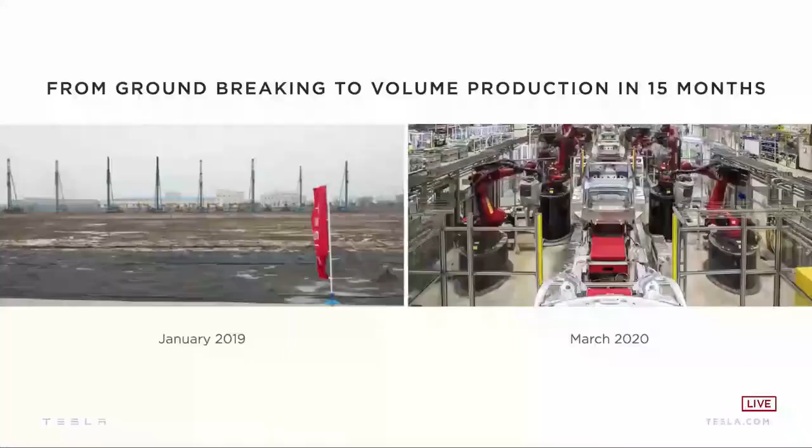So really, I'm just going through a recap of what's happened over the past year or so, starting with our ability to create a factory. Huge kudos to the Tesla Shanghai team for being able to go from literally a dirt pile to volume production in 15 months. It's like, damn.

Something that's really quite noteworthy here is Tesla is the only foreign manufacturer to have a 100% owned factory in China. This is often not well understood or appreciated, but to have the only 100% owned foreign factory in China is a really big deal, and it's paying huge dividends here.

We really wouldn't have the results that we have had this year without the great efforts of the Tesla China team, so I'm super appreciative of that. And we'll see the Shanghai factory continue to scale quite a bit from where it is right now. I think we could really expect that to be, over time, a factory that produces over 1 million vehicles a year.

It's cool. So we also reached volume production of the Model Y this past year, and this was the smoothest launch that we've ever had. So I think we're definitely getting better at new vehicle launches, building factories, and scaling production. As I've said before, the hardest thing is scaling production, especially of a new technology.

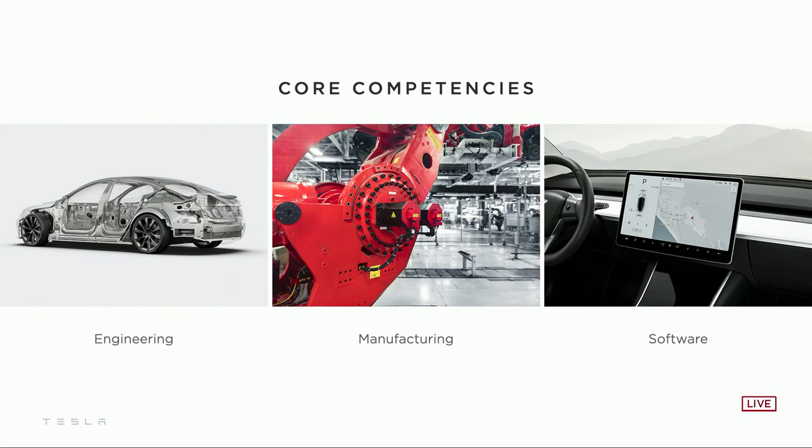Tesla's core competencies: engineering, obviously, but also manufacturing. I think manufacturing is underappreciated in general, and the difficulty of designing the machine that makes the machine is vastly harder than the machine itself. So making a Model 3, Model Y, or Cybertruck prototype is really quite trivial compared to designing the factory that makes it. Especially with new technology and new manufacturing methods, it's at least 10 to 100 times harder to do the factory than the prototype. That's why a lot of companies or startups bring out a prototype but can't get it over the hump for manufacturing, because manufacturing of new technology is the hardest thing by far.

Basically the prototype is at best 10% of the difficulty, probably closer to 1%. And then software—Tesla is both a hardware and a software company, so a huge percentage of our engineers are software engineers. You can think of our car as kind of like a laptop on wheels, so software is incredibly important, not just in the car but also in the factory. The factory software is extremely important. These are the 3 critical areas needed to make an awesome company.

We now have, and will soon have, 3 new factories on 3 different continents. Shanghai—we're expanding with the second phase. Berlin is making rapid progress. And Texas is making even faster progress.

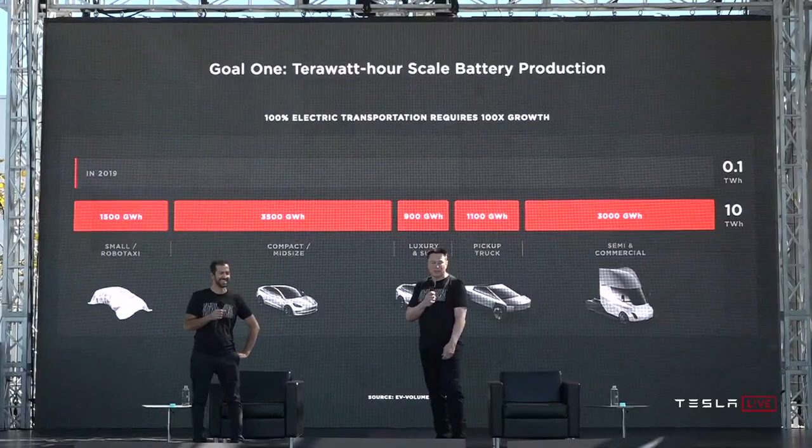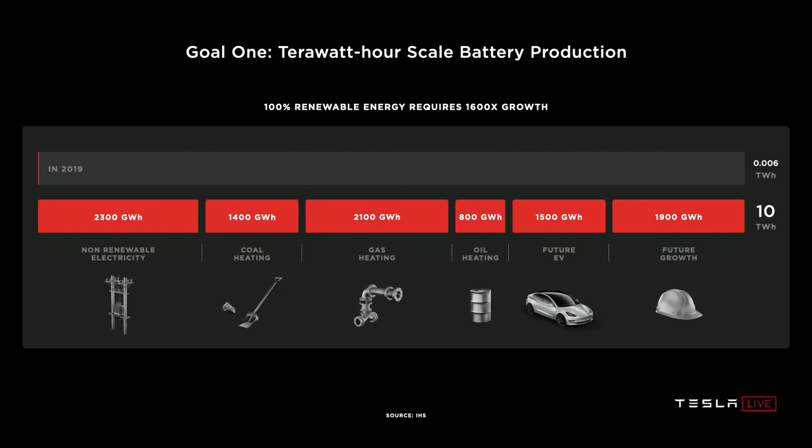And then on the grid side, we have a similar mountain to climb: 1,600 times growth from today's grid batteries to go 100% renewable on the grid and to take all of the existing heating fossil fuel uses in homes and businesses to 100% electric.

And this number, I think, might grow even more, as the world economy matures and as countries with high populations industrialize, we could see this number be even more. But let's say it's roughly 20 to 25 terawatt hours per year, sustained for 15 to 25 years, to transition the world to renewable. This is a lot.

So today's batteries cannot scale fast enough. They're just too small. For Giga Nevada, 150 gigawatt hours per year is like what we probably expect to make out of there. But this is really pretty small in the grand scheme of things. That's only 0.15 terawatt hours.

And they cost too much. So we would need 135 fully built out Nevada gigafactories to achieve 20 terawatt hours a year. It's not scalable enough of a solution. We need a dramatic rethink of the cell manufacturing system to scale as fast as we can and should.

And I think we should view this as more than just a question of money. Money is sort of like an ethereal thing, but it's really the amount of effort. You have a certain amount of effort in terms of people and machines, and depending on how efficient that effort is, for a given amount of effort, you want the most amount of batteries. So it's not just a question of, well, if we had $2 trillion, tomorrow you could make this. It's not that easy. You actually need to organize a massive number of people, build a lot of machines, build the machines that make the machines, and so it's incredibly important to have that effort yield the most number of batteries.

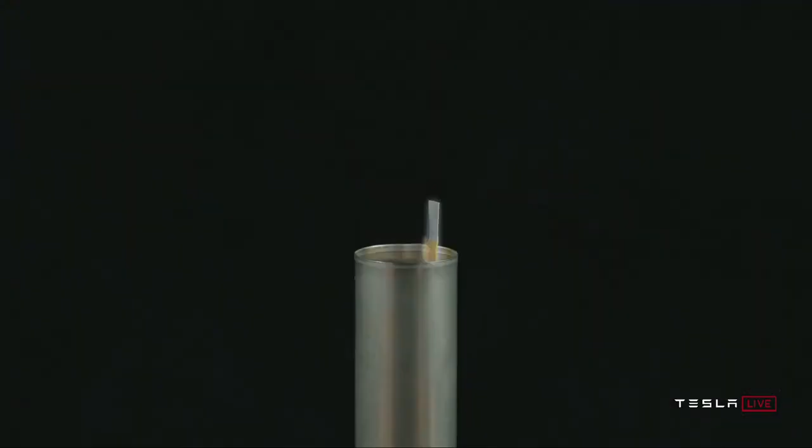So first, before we get too far into it, let's talk about what is in a battery cell. We've got the cap and the can, negative and positive terminals of the cell. When you open that cell, you've got a tab connected to those terminals, what we call the jelly roll, which is the wound electrodes on the inside.

You can actually see what this looks like as you unwind it. This is over a meter long in a typical 2170 cell, so it's quite a long winding process. And you can see the tab still there.

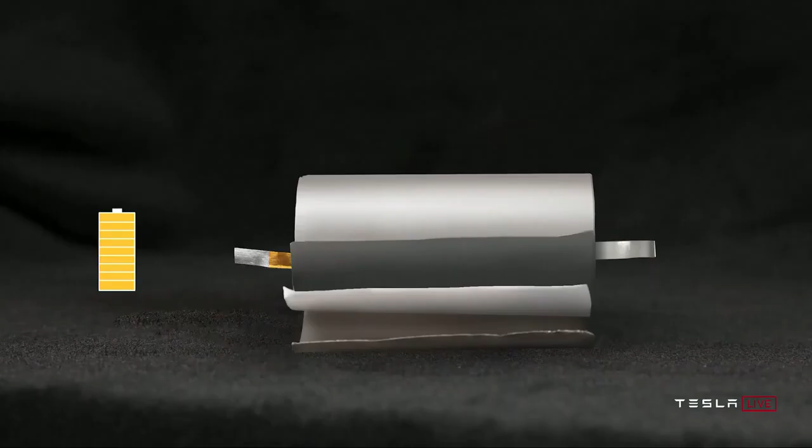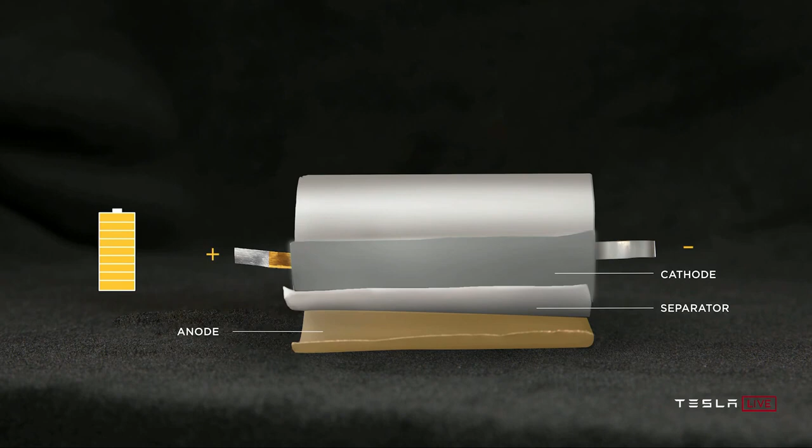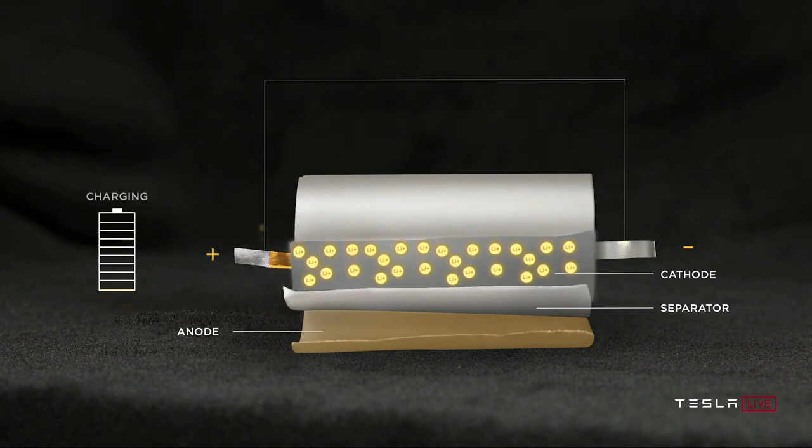To explain what's actually going on here, we've identified anode, cathode, separator, positive and negative terminal. Watch what happens as we discharge the cell: lithium moving from anode to cathode. When we charge the cell, lithium moves from cathode to anode across the separator. This is the basic principle of all lithium-ion batteries, no matter what the form factor is.

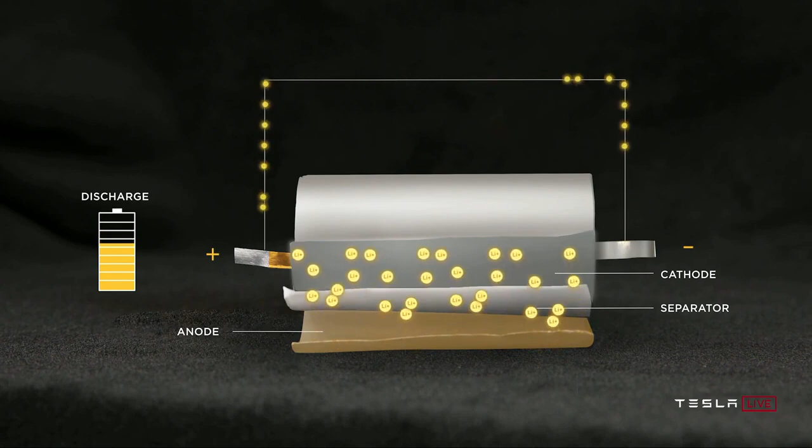When we look at what's happened to date, at least in our products, we've moved from the 18650 form factor to the 2170 form factor through great collaboration with our partners, Panasonic, new partners like LG and CATL, and probably others in the future.

A slight note on why is the one called the 18650, versus the 2170: the first two digits refer to the diameter, and the second two digits refer to the length. That helps explain why these weird numbers. But nobody could explain to me why there was an extra zero. So I said, okay, well we're deleting the zero that nobody can explain in future form factors. So technically it's the 18650, but going forward it's the 2170 because we just got rid of the extra zero since it's pointless.

This was an evolutionary step, going from 1865 to 2170, bringing 50% more energy into the cell. But when we look to the ideal cell design, if we were to do it ourselves, we need to go beyond just what's in front of us, and study the full spectrum of options.

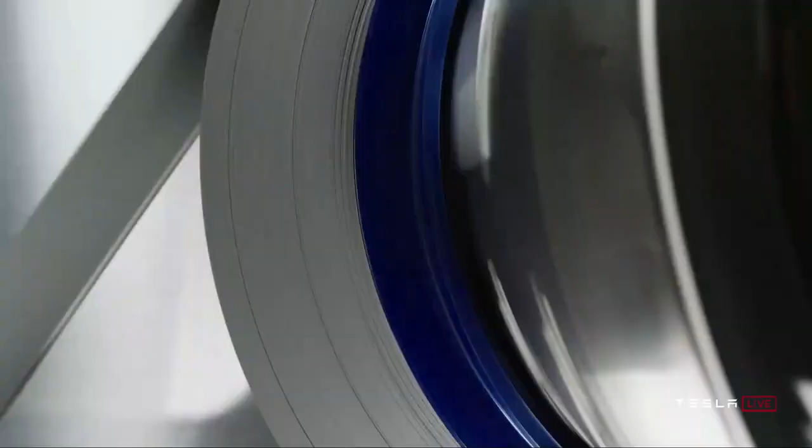And I want to stress, this is not just a concept or a rendering. We are starting to ramp up manufacturing of these cells at our pilot 10 gigawatt hour production facility just around the corner. Here's a video of some of what's going on in the plant.

To be clear, it will take about a year to reach the 10 gigawatt hour capacity. This is important to appreciate. When you build a factory, there's a certain capacity you design to, and then it takes some period of time to actually achieve that capacity. So it's probably about a year before we get to the 10 gigawatt hour annualized rate with the pilot plant, and this is just a pilot plant. The actual production plants will be more on the order of maybe 200 gigawatt hours, maybe more over time.

Let's stack up everything we just saw at the cell level. Just the cell form factor change enables a 14% dollar per kilowatt hour reduction. And now that you've been teased on this factory, we're going to go step by step through that factory and discuss a series of innovations there.

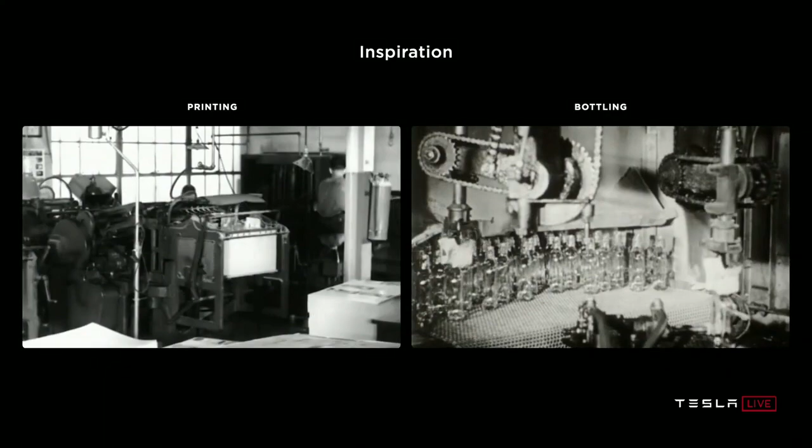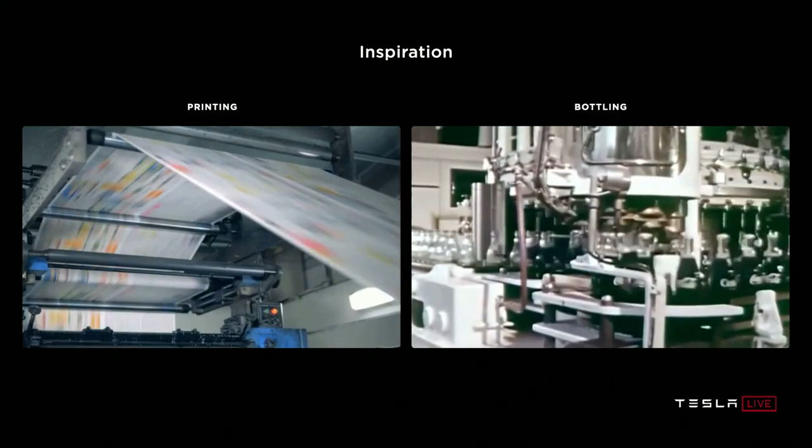When thinking about the ideal cell factory, we have inspirations behind us in the paper and bottling industry, where from humble beginnings, over a century of innovation has enabled mass scale, continuous motion, unbelievably low manufacturing cost. When we think about the lithium-ion industry, which is really only in its 3rd decade of high-volume production, it has so far to go to achieve similar scale and simplicity. That was the inspiration we set out to the team as we thought about how to marry cell design and manufacturing in the best possible factory.

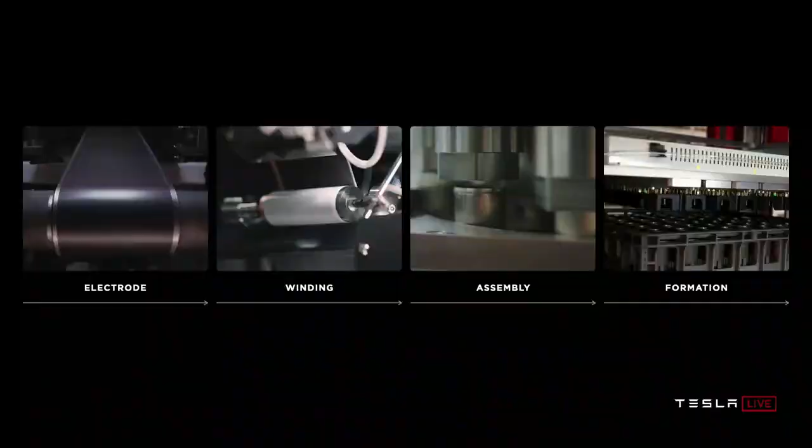Let's talk about what's in a cell factory. First, there's an electrode process where the active materials are coated into films onto foils. Then those coated foils are wound in the winding process we just talked about, where if you do have tabs, you have to start and stop a lot. Then the jelly roll is assembled into the can, sealed, filled with electrolyte, and then sent to formation, where the cell is charged for the first time, and where the electrochemistry is set and the quality of the cell is verified. We set out at every step of this process to take that inspiration and think about how we make those processes fundamentally better and more scalable.

One of the most important processes is where it all begins, the wet process of the electrode coating. Just to give you a sense of scale, I'm going to walk through what's in that wet process.

You've got mixing, where the powders are mixed with either a water or a solvent for the cathode. That mix then goes into a large coat and dry oven where the slurry is coated onto the foil, huge ovens, tens of meters long, dried, and that solvent then has to be recovered. You can see the solvent recovery system. And then finally, the coated foil is compressed to the final density.

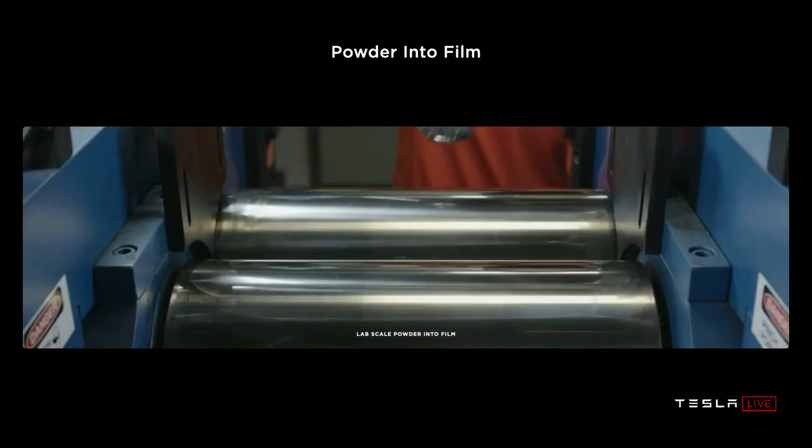I mean, it's hard, actually, just to be clear. If this was easy, everyone would do it. So it's not like dry coating electrode is actually easy. It's actually very hard to do what appears to be a simple thing.

It's worth noting we did acquire Maxwell a little over a year ago. It's certainly a good company, but the dry coating they had was like, I would call it proof of concept. Since the acquisition, we've actually revved the machine that does the dry coating 4 times. So we're in revision 4 post-acquisition of the machine, and there's still a lot of work to do. I would not say this is completely in the bag.

As you go from benchtop to lab to pilot to volume production, there are actually major issues that you encounter at every level. It's not like you make something work on your bench and bingo, now you can make a bazillion of it. It's insanely difficult to scale up. But if you do scale it up, what you saw before becomes this. So you can see the motivation.

A 10 times reduction in footprint, a 10 times reduction in energy, and a massive reduction in investment. But as Elon was saying, simple is hard.

I would like to not say that right now it's totally working. It's close to working, but even now at the pilot plant level, it's not there yet. Well, it's fair to say it does work, but with not a high yield.

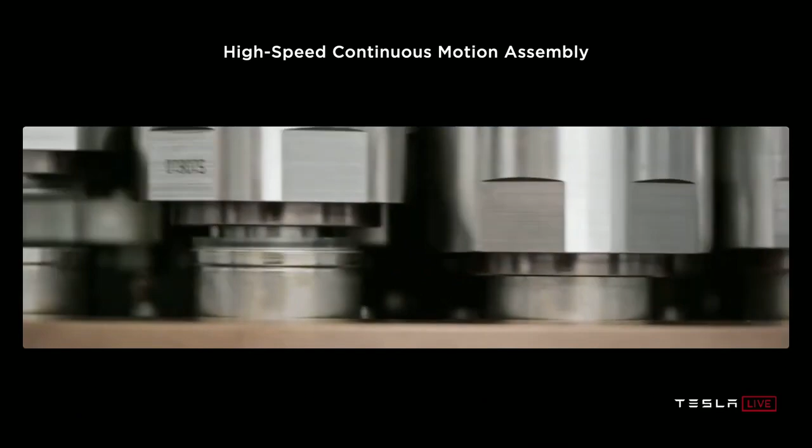So let's talk a little bit about assembly, which is next. The key to a high-performing assembly line is accomplishing processes while in continuous motion, thinking of the line as a highway: max velocity down the highway, no start and stop, no city driving. Exactly, no stoplights or traffic lights. You want the highway. I want the highway.

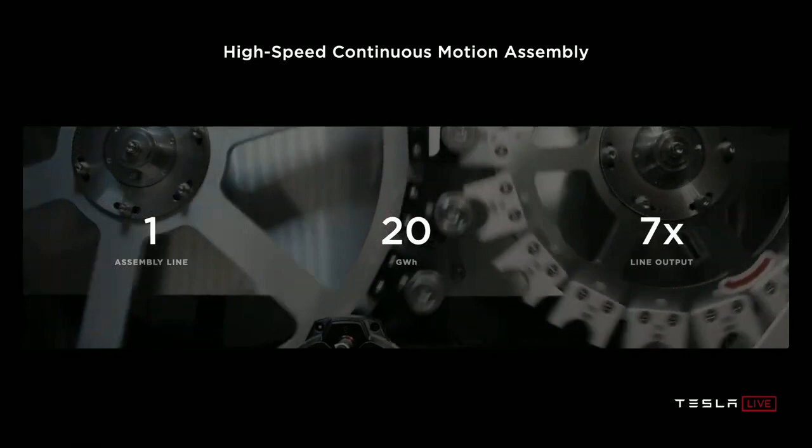Together with our internal design team that makes and designs this equipment, we coupled thinking about how to make the best cell with thinking about how to make the best equipment, so that we could accomplish the fastest parts per minute rates on all of these tools. Through that development, we were able to implement assembly lines: one line, 20 gigawatt hours, a 7 times increase in output per line. When you're thinking about scalability and pure effort, having one line be 7x the capability is just effort multiplying.

You can think about the fundamental physics of a factory. I think it's actually quite a lot like the rocket equation, where you've got your exhaust velocity and then the log of the start to end masses. So it's basically saying how fast are things going, and what percentage of the factory volume is doing useful work — conveyance does not count as useful work.

Only the value-added steps. If you break the factory down into cubic meter sections, or smaller, like 1 liter sections, and ask: is a majority of this volume doing useful work? You would be astounded at how bad most factories are — they're like maybe 2 or 3%, including our factory in Fremont. I think it is possible to get to at least 10 times that volumetric efficiency, more like 30% ish, maybe more, and be 10x better, which means the factory can be 10 times smaller.

And then the other thing is, how fast are things going through the factory? It's speed and density. The faster you go — a factory moving at twice the speed of another is equivalent to two factories basically — and the company that will be successful is the company that with one factory can accomplish what other companies take 2, 3, or 4 factories to do. So what we're trying to do here is say, how do we with one factory achieve what maybe 5 or even 10 factories would normally be required to achieve?

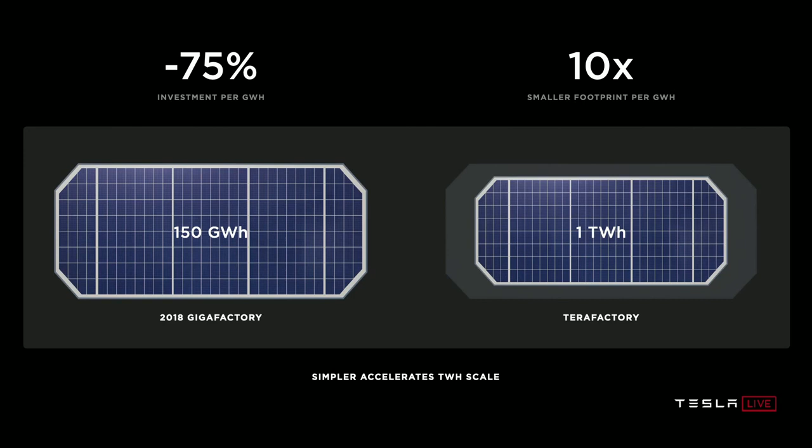Essentially what this translates to, based on what we know today, is about a 75% reduction in the investment per kilowatt hour or gigawatt hour. It's basically 4 times better than the current state of the art to the best of our knowledge. And I think there's probably room to improve even beyond that. Definitely, yeah.

We're able to, from a volume standpoint, actually get, in a smaller form factor than Giga Nevada, many times the cell output. So you can see, basically we can get a terawatt hour in less space than it took to make a gigawatt hour, 150 gigawatt hours.

So this is pretty profound. I would actually not have thought this was possible several years ago. That we could actually get to terawatt hour scale in less space than what we currently envision for doing 150 gigawatt hours. Yes, simpler accelerates terawatt hour scale, and that's what we need to do to accelerate our mission.

And as Elon said, we're going to try to even improve on this as we push towards our goals. So, this is just talking about Tesla internal cell production.

As I tweeted out earlier, we will continue to use our cell suppliers, Panasonic, LG, and CATL. So this 100 gigawatt hours is supplemental to what we buy from suppliers. Essentially, this does reduce our weighted average cost of a cell, but it allows us to make a lot more cars and a lot more stationary storage. Long term, we're expecting to make on the order of 3,000 gigawatt hours, or 3 terawatt hours, per year.

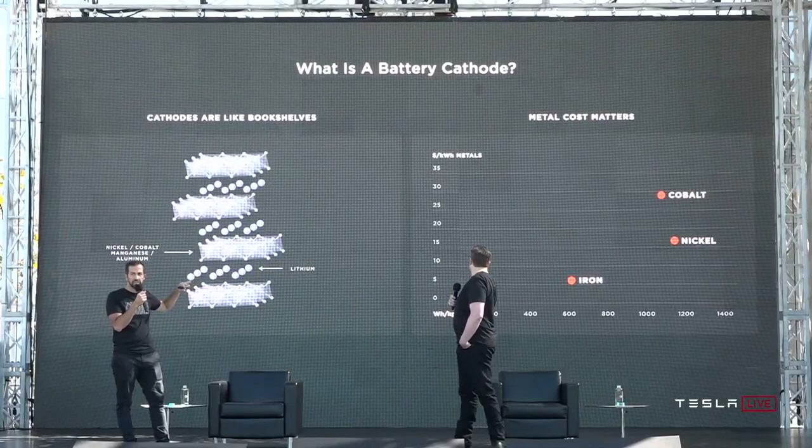Absolutely, I totally agree. And I think people are always talking about like, oh, what's the cathode going to be, is it NCA or whatever? The thing to consider is just fundamentally what the nickel, the metals are capable of, and that's what we have on the chart here: dollar per kilowatt hour cathode of just the metal, using LME, London Metal Exchange prices, versus the energy density of just the cathode. You can see nickel is the cheapest and the highest energy density, and that's why increasing nickel is a goal of ours, and really everybody's, in the battery industry.

But one of the reasons cobalt is even used at all is because it's a very stable bookshelf, and the challenge with going to pure nickel is stabilizing that bookshelf with only nickel. That's what we've been working on with our high nickel cathode development, which has zero cobalt in it. Leveraging novel coatings and dopants, we can get a 15% reduction in cathode dollar per kilowatt hour. Big deal.

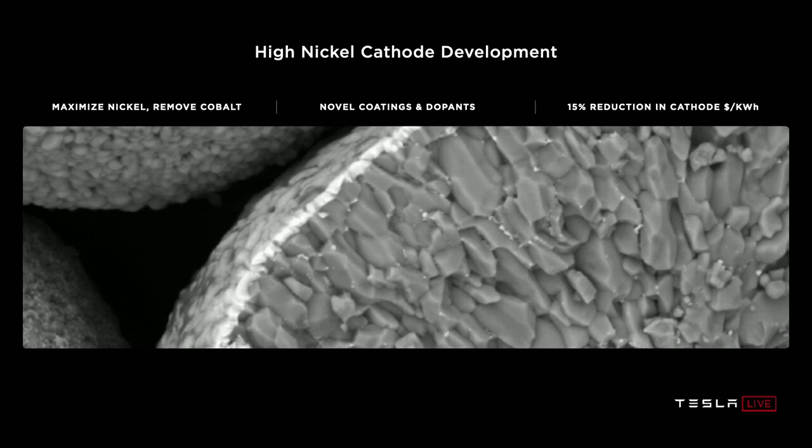But it's not just about nickel. In order to scale, we really need to make sure we're not constrained by total nickel availability. I actually spoke with the CEOs of the biggest mining companies in the world and said, please make more nickel, it's very important. And I think they are going to make more nickel.

But there's also, I think, a need for a 3-tiered approach to batteries: starting with iron, that's kind of like a medium range, then nickel manganese as a medium-plus intermediate, and then high nickel for long range applications like Cybertruck and the Semi. Because something like a semi truck, it's extremely important to have high energy density in order to get long range.

Giving iron a bit more time - although if you look at watt-hours per kilogram at the cathode level, iron looks like it's half as good as nickel. But when you fully consider it at the pack level, everything taken into account, nickel is only about 50 to 60% better than iron. So iron is a little better than it seems when fully considered at the pack level - not as good as nickel, but actually pretty good. Good for stationary storage and medium range applications where energy density isn't paramount.

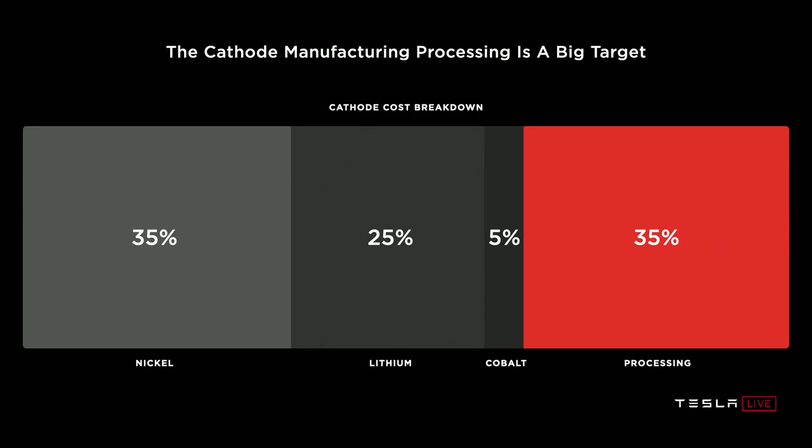Beyond the metals - because a lot of people spend time talking about metals - actually the cathode process itself is a big target. 35% of the cathode dollar per kilowatt hour is just in transferring it into its final form. So we see that as a big target, and we decided to take that on.

Here's a view of the traditional cathode process. If you start at the left, you have the metal from the mine. The first thing that happens is the metal is changed into an intermediate called metal sulfate, because that's just what chemists wanted a long time ago. Then when making the cathode, you take this metal sulfate, add chemicals, add a whole bunch of water, a whole bunch of stuff happens in the middle, and at the end you get that little bit of cathode and a whole bunch of wastewater and byproducts.

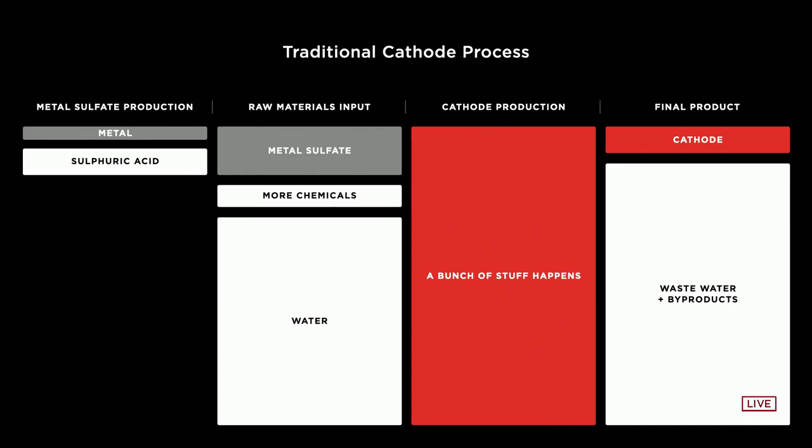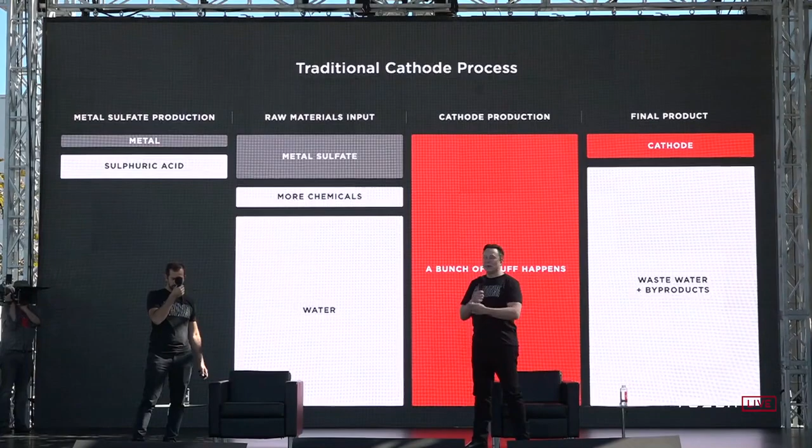It's insanely complicated. If you follow the journey of a single nickel atom, it's crazy - you're going around the world three times. It's the moral equivalent of digging a ditch, filling it in, and digging it again. Total madness, basically. These processes just grew up as legacy things - how it was done before - and people connected the dots without thinking of the whole thing from first principles: how do we get from nickel ore in the ground to the finished nickel product for a battery. So we looked at the entire value chain and asked how we can make this as simple as possible. That's what we're proposing with our process.

As you can see, a lot less is going on here. We get rid of the intermediate - metal, water, final product cathode - and recirculate the water, with no wastewater at all. Summarized, that's a 66% reduction in CapEx investment, a 76% reduction in process cost, and zero wastewater. A much more scalable solution.

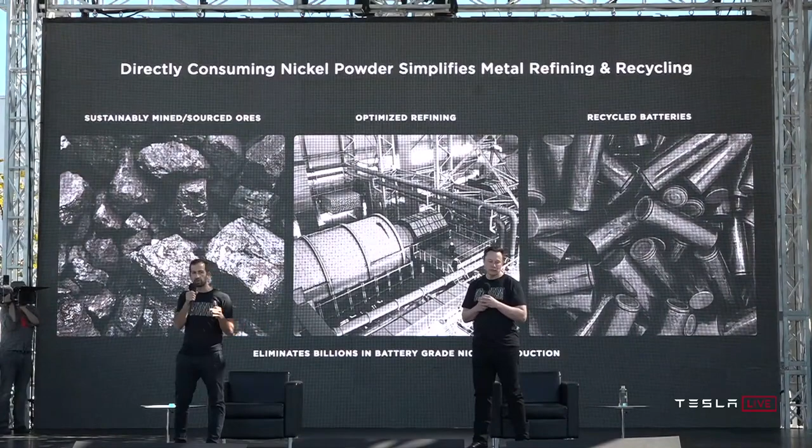When you think about the fact that we're now directly consuming raw metal nickel powder, it dramatically simplifies the metal refining part of the whole process. So we can eliminate billions in battery-grade nickel intermediate production - it's not needed at all.

We can also use that same process to directly consume the metal powder coming out of recycled electric vehicle and grid storage batteries. So this process enables both simpler mining and simpler recycling.

Now that we have this process, we're going to build our own cathode facility in North America, leveraging all the North American resources that exist for nickel and lithium. Just by localizing our cathode supply chain and production, we can reduce miles traveled by all the materials that end up in the cathode by 80%, which is huge for cost.

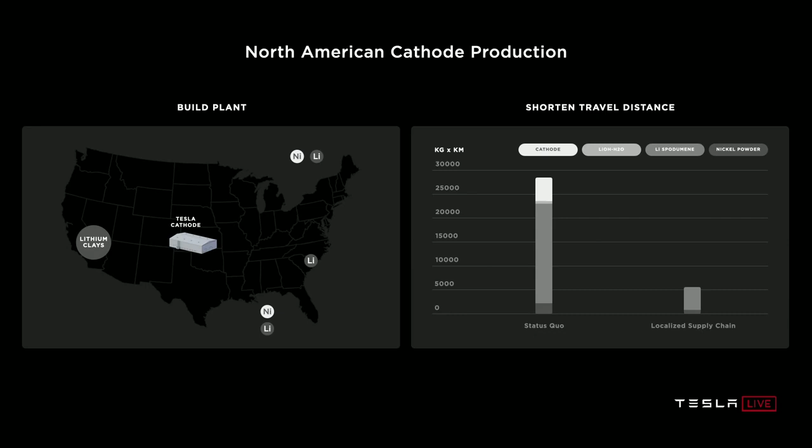To be clear, cathode production would be part of the Tesla cell production plant - basically raw materials coming from the mine, and out comes a battery. On that note, the way lithium ends up in the cell is through the cathode, so we should obviously do on-site lithium conversion as well, using a new process we're going to pioneer. That's a sulfate-free process again, skipping the intermediate - 33% reduction in lithium cost, and a 100% electric facility co-located with the cathode plant.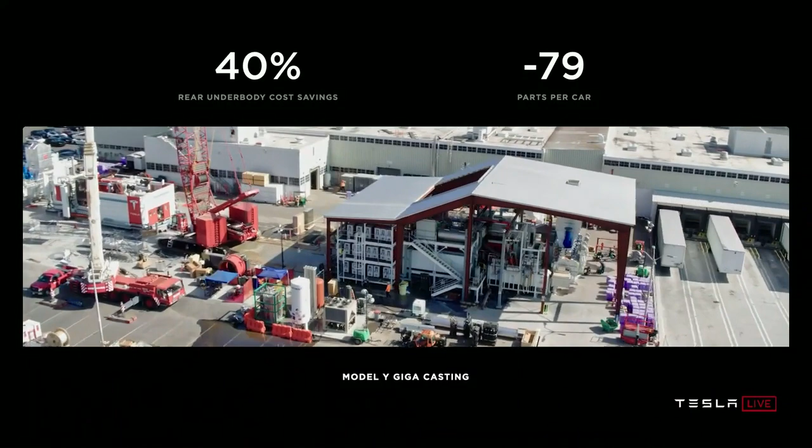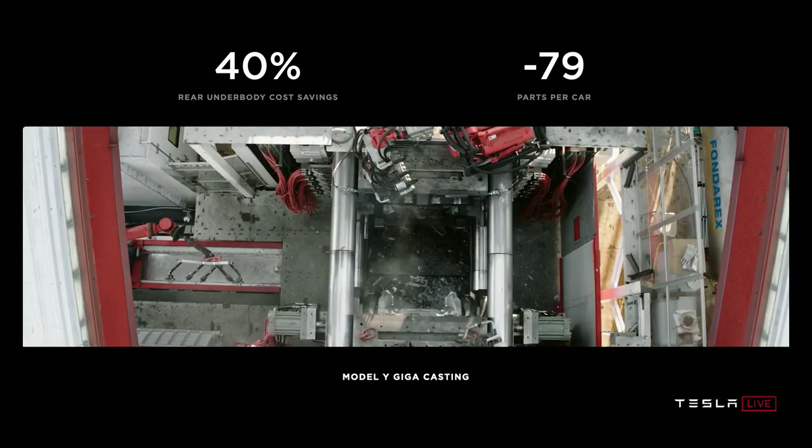So it starts with having a single piece casting for the front body and the rear body. And in order to do this, we commissioned the largest casting machine that has ever been made, and it's currently working just over the road at our Fremont plant.

We have it, it's pretty sweet, currently making the entire rear section of the car as a single piece, high pressure die cast aluminum. In order to do this, we actually had to develop our own alloy because we wanted a high strength casting alloy that did not require coatings or heat treatment. This is a big deal for castings, especially with a large casting. If you heat treat it afterwards, it tends to deform, kind of does this potato chip thing, so it's very hard to keep a large casting to have its shape. There was no alloy that existed that could do this, so we developed our own special alloy of aluminum that has high strength without heat treat and is very castable.

That's a great achievement of our materials team. In fact, in general, we've got a lot of advanced materials coming for Tesla, new alloys and materials that have never existed before. So you're basically making the front and rear of the car as a single piece, and then that interfaces to what we call the structural battery, where the battery for the first time will have dual use, both as an energy device and as structure.

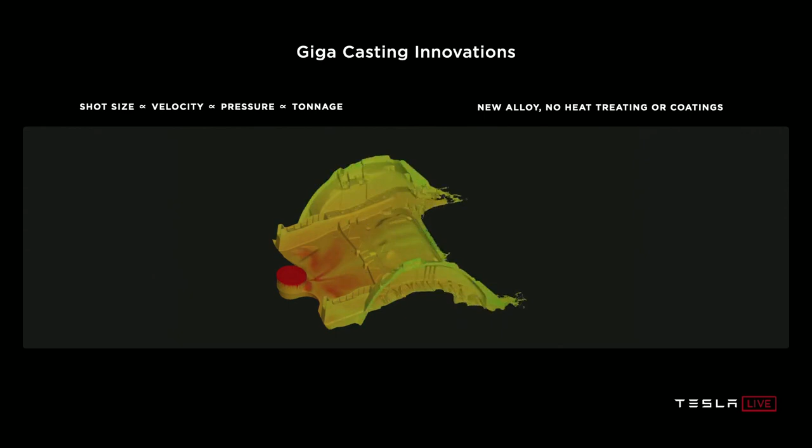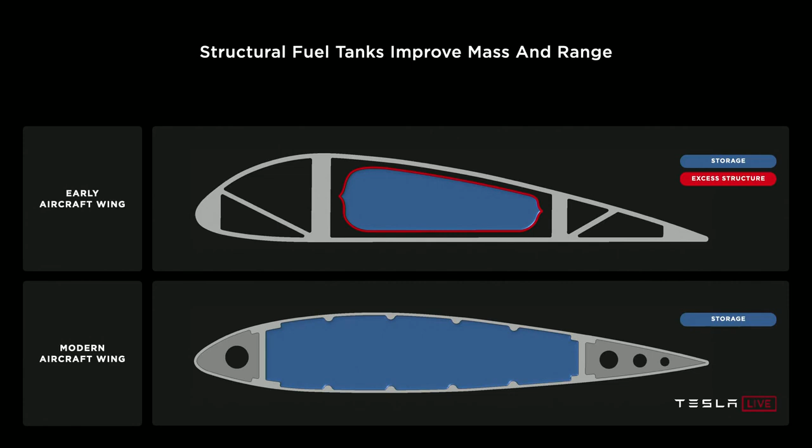This is absolutely the way things are done. In the early days of aircraft, they would carry the fuel tanks as cargo. The fuel tanks were actually quite difficult to carry, basically worse than cargo, you had to bolt them down. It was very difficult. Then somebody said, hey, what if we just make the wing tanks, what if we just make the fuel tank in wing shape? So all modern airplanes, the wing is just a fuel tank in wing shape. This is absolutely the way to do it. The fuel tank serves as dual structure, it's no longer cargo, it's fundamental to the structure of the aircraft. This was a major breakthrough.

We're doing the same for cars. So this is really quite profound. Effectively, the non-cell portion of the battery has negative mass. We save more mass in the rest of the vehicle than the non-cell portion of the battery weighs. So it's like, well, how do you really minimize the mass of a battery? Make it negative, make the non-cell portion of the battery pack negative.

It also allows us to pack the cells more densely because we do not have intermediate structure in the battery pack. Instead of having supports and stabilizers and stringers and structural elements in the battery, we now have a lot more space in the battery because the pack itself is structural.

What we do is essentially, instead of having just a filler that is a flame retardant, which is currently what is in the 3 and Y battery packs, we have a filler that is a structural adhesive as well as flame retardant. So it effectively glues the cells to the top and bottom sheet, and this allows you to do shear transfer between the upper and lower sheet. Just like if you have a Formula One car or a racing boat with carbon fiber face sheets and aluminum honeycomb between them, this gives you incredible stiffness. It's really the way any super fast thing works, you create a honeycomb sandwich with two face sheets.

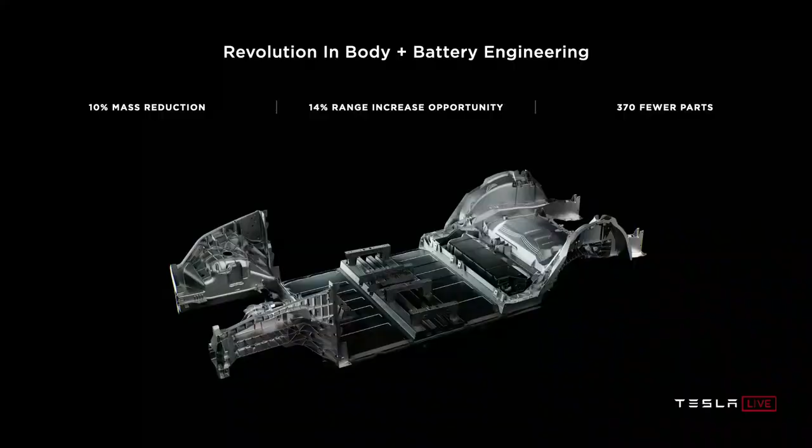So, like I said, 10% mass reduction in the body of the car, 14% range increase, and 370 fewer parts.

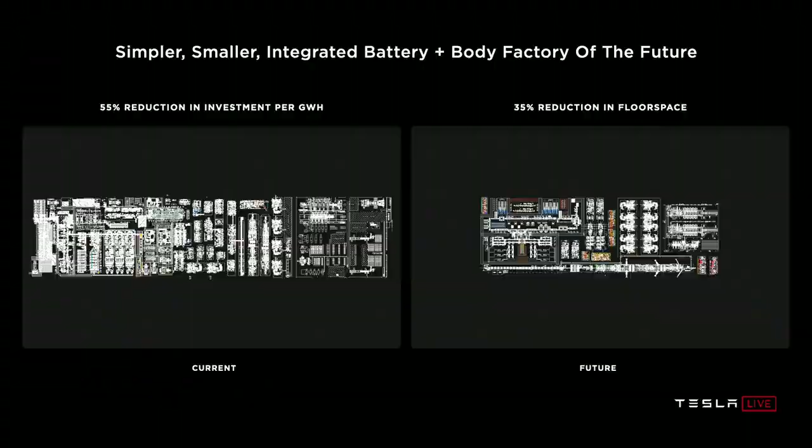I really think that long term, any cars that do not take this architecture will not be competitive. And it's not just a better product, but in the factory it's a massive simplification—you saw the part removal, the casting machines, the structural battery pack. We're looking at over 50% reduction in investment per gigawatt hour, 35% reduction in floor space, and we'll continue to improve that as we build the vehicle factory of the future. It's major improvements on all fronts, from the cell all the way to the vehicle.

In addition to the improvements on enabling additional range and improving structural performance, it's worth another 7% dollar per kilowatt hour reduction at the battery pack level, bringing our total reductions now to 56% dollars per kilowatt hour.

So stacking it up, we're not just talking about cost or range—we've got to look at all the facets. Range increase: we're unlocking up to 54% increase in range for our vehicles and energy density for our energy products. 56% reduction in dollars per kilowatt hour at the battery pack level, and a 69% reduction in investment per gigawatt hour, which is the true enabler when we talk about how we achieve this scale.